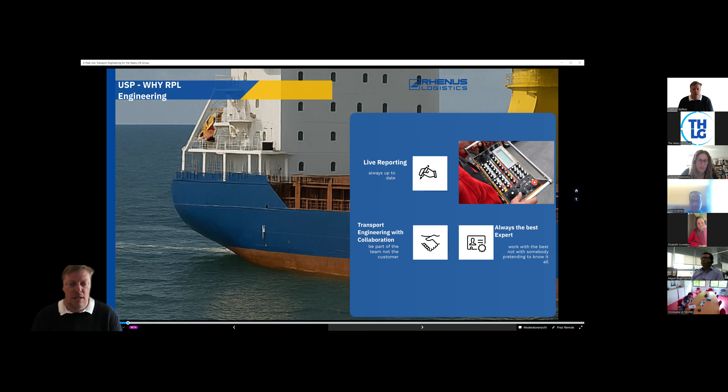So we try to find an expert who really knows the cargo or the ship type best, to have the best solution on the spot, because we don't want a surveyor who's just taking pictures, where in case of a claim he can say, okay, I saw it, I was there, here's the picture, here's the proof. No, we want somebody who can step in and say, stop, let's not do it like this - this is dangerous, this is not safe, but I have a solution, let's do it like this instead.

And this attitude you can only get from expert personnel. So sometimes it's much better, even if you lose some money, by sending a freelancer instead of sending your own staff - then you are free of your headaches and you get the best experience. And all of a sudden, like you might have felt, we're also doing workshops and trainings.

So just quickly a little bit about me. I started about 20 years ago after my time in the Navy, in 2001, with a German carrier called Cargo-Levant as a shipping apprentice - quite a normal way in Germany to start in shipping. And after all the commercial, water clerk, operation, chartering, I went to university and studied shipping and logistics.

And during university time, I figured it was good to work a little bit, and I went to Harren & Partner, which was back in the days with the carrier J. Poulsen and Combi Lift, when Combi Lift was not a forwarder but a carrier with its own ships. I started there in the engineering team and also on the small project freight forwarder they had in-house, where we did engines to Mombasa.

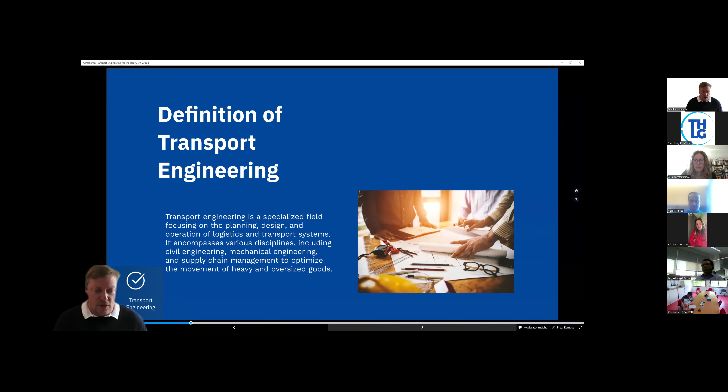So I just laid down a couple of bullet points. Sometimes we are professional overthinkers, Colin can tell you, and also many of you might know sometimes the transport engineer or the surveyor steps in and asks questions nobody has thought about, which can be the pain in the behind, but mostly it's because of a reason, because they have seen things go wrong or experienced that this is not really safe. So sometimes it makes sense to listen to them.

Stowage planning is one part. We have to look into the drawings and also sometimes tell the shippers how to make the drawings. Because the guys from construction are also now working with more and more 3D models, which they don't want to share because obviously they don't want any company to copy their products. So sometimes we have to tell them, okay, for transportation we need a side view, a front view, a top view, we need the COG, we need the capacity of your lifting eyes, and things like that, which the manufacturer normally doesn't think about.

So we have to not only read the drawing, but sometimes also consult what the carrier, the stevedore, the crane operator need to see in the drawing to be able to handle that cargo safely.

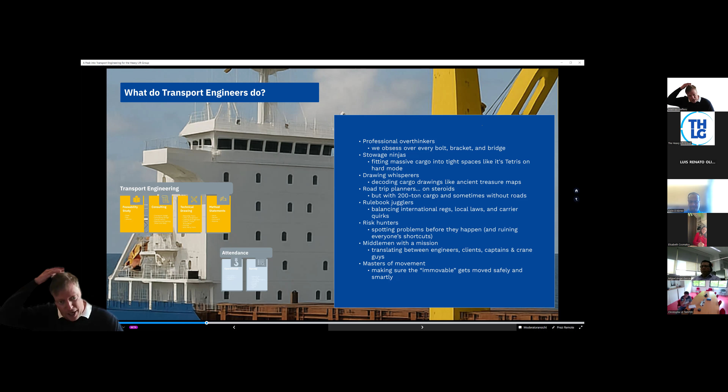And luckily I also have a commercial background. So some of the ideas I hear or have in my head, I have to filter out even before going back to the commercial part of our customers. Otherwise, they would laugh at me or kill me directly.

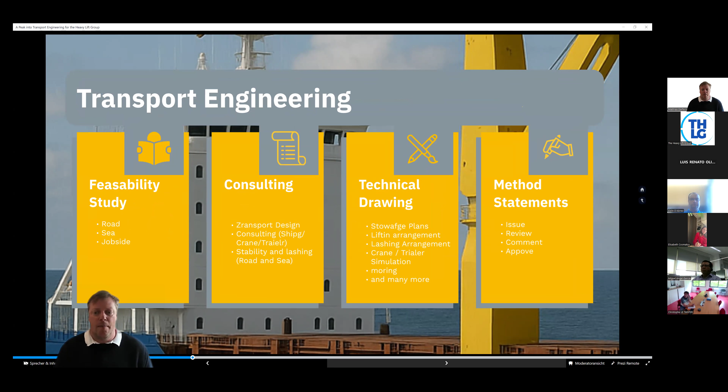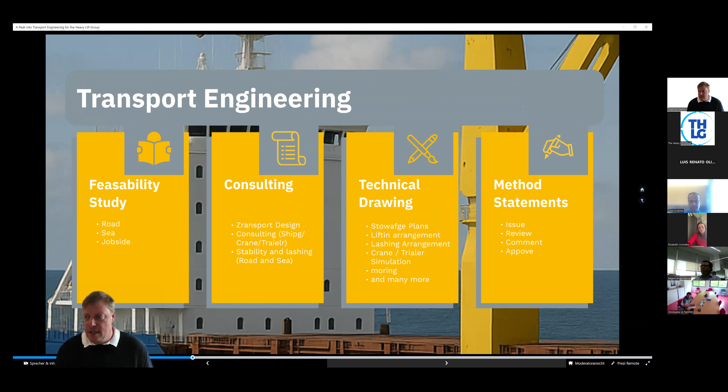So just a summary of a few things. Our main in-house work is feasibility studies and consulting. As I just said, we prepare technical drawings of stowage plans, lifting arrangements, lashing arrangements, crane drawings, and we issue and review method statements.

The second part, as I mentioned, is attendance. This can either be as a port captain, who is the link between the stevedore and the master and helps to load the ship at best, or on the other side, as a surveyor, looking at it from another perspective, giving hints, saying stop.

We make survey reports for the insurance companies, for the carriers, for the heavy hauliers, and for the forwarders. So the importance of heavy lift and out-of-gauge cargo comes more and more into play as insurance companies got more and more conservative. We regularly hear that insurance companies now change their policy a little bit, where they say, okay, we reduce your premium, but therefore you have to find and pay your own surveyor, and we have to approve him if we like him, if he's okay with the experience, and send him out.

Because cargo values are getting higher, and on the other hand, the cargos are getting more and more complex. One big topic, of course, is modularization. We hear it from ThyssenKrupp, we hear it from many other companies, trying to produce as much as possible on the yard in modules, and then later on at the final destination, just collect the modules, put them on each other, and then you're ready to go.

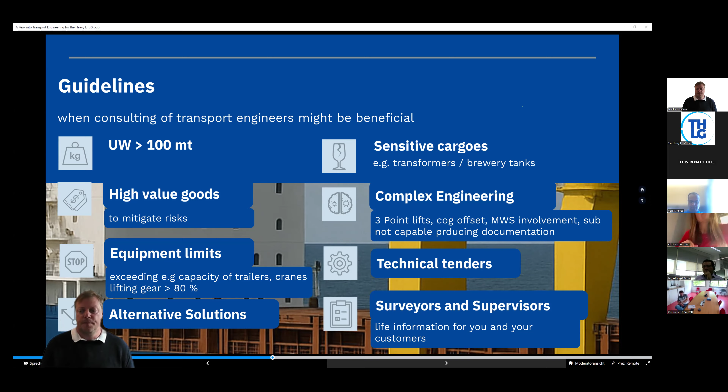So as I just said, transport engineers get more and more important, but on the other hand - only talking for Europe for the moment, I know in the US the problem is equal I think, but I can't speak for Asia and South America - we have less and less qualified transport engineers at the moment.

Just for example, for the Port of Hamburg, at the beginning of the year I had 3 freelancers I was working with regularly. All shut down their offices now. And this is not because they weren't working enough or there wasn't enough work - this is the opposite. Either an insurance company came to them and said, okay we want to hire you, here's your fixed salary and you don't have to hustle from job to job, or their biggest customer took them directly over.

Or they really went out of business due to the complex work atmosphere - not because they didn't like the job, but some of the freelancers being 30 days a month on the road without seeing the family, and being at risk of getting claimed, were just not taking it anymore and didn't want to hustle with that anymore.

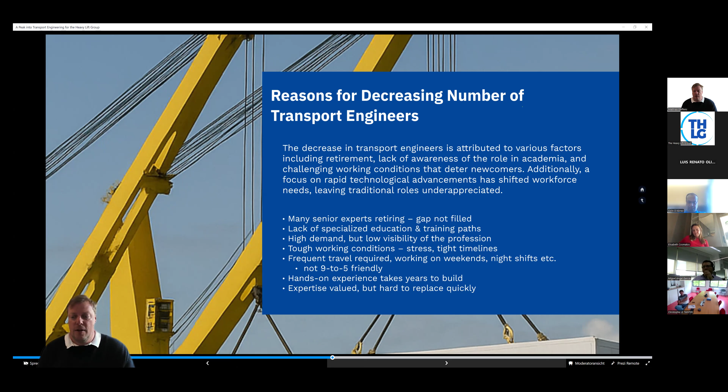We are lucky to have some, but this will not be getting better in the near future, I would say. So for the market outlook, I already said in the transport engineering field, I see the demand is growing.

The demand is growing in line with the ISO standards and the HSE standards. Because the higher the HSE standards or demands from your customer get, they want to make sure the HSE standards will be followed. They ask for a method statement, a risk assessment. This has to be written, prepared, reviewed, and also supervised in the port with a surveyor or even an HSE surveyor.

That means the staff you need for complex projects, for EPC, has increased dramatically in the last years. I was talking last year to a guy from Ørsted, the wind manufacturer, on a job site, and he told me when he started at Ørsted, they were a project team of 6 guys and built a wind park.

This was the good old times for him. Now it doesn't matter if the nacelle gets bigger or if there are more modules in the wind park, because that just makes the time longer. He said nowadays they have 60 people in the project team, more or less 54 people pushing paper and inventing documents the others have to fill out, and the 6 people from the past are building the wind park. So you have to consider all this.

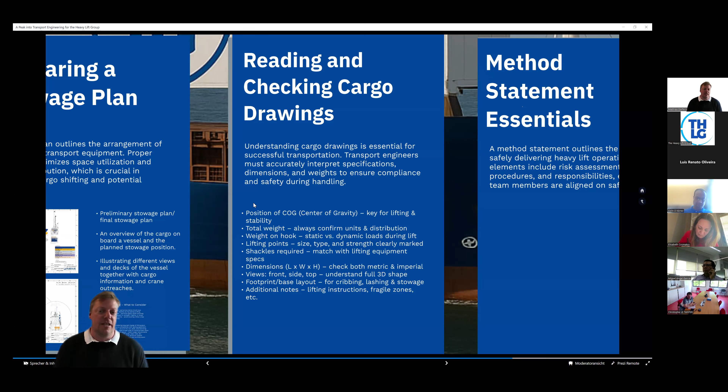I really love it when shippers come to me and say, okay, we want a full method statement, but you don't get any cargo drawings because we're afraid of copycats. This is very interesting. Or they send you a cargo drawing in really bad PDF quality - really bad quality - and you should make the most of it, which is very difficult. Then we end up making a kind of cargo drawing ourselves, which is no problem for us, but for the customer it is, because they pay us by the hour.

So, is that why you come and see us after? Sorry, say again? That's why you come and see us after.

What we need inside a cargo drawing is mainly always the same. It depends a little on your cargo, especially on the footprint size matter, but we'll have a quick look at an AutoCAD drawing in a few minutes.

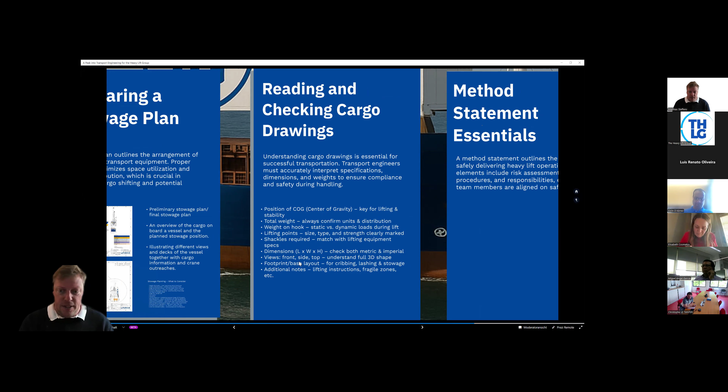Of course, we need the total dimensions: length, width, height. We need the position of the center of gravity in the front view, side view, and top view, because this is what we always need for lifting. It doesn't matter how we lift, the center of gravity of the cargo will always move underneath our hook. In a worst case scenario, this can lead to the cargo moving, and if someone is standing there, then we don't just have cargo damage, we have a totally different issue. Luckily, I've never had an incident with blood on the cargo, and I want to keep it that way.

The number one rule, especially for cargo drawings, is bullshit in is bullshit out. So the cargo drawings need to be accurate and reflect the cargo, especially when you have packed cargoes. It doesn't make sense to send a cargo drawing like 'this is how the cargo looked 10 years ago,' but we don't have a new drawing, and then you have the case fully packed and you don't see the center of gravity, you don't see the lifting points - you see nothing.

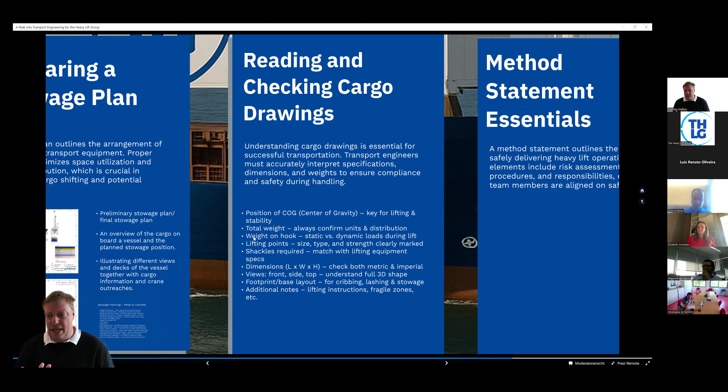That doesn't help. So you need the information of the total unit weight, including packing and everything. Then sometimes you have the weight on the hook with a static and dynamic load. This goes too deep now - I'll leave that out for a moment.

The lifting points - do we have trunnions? Do we have pad eyes? Can we sling around the cargo? Where are the strong points to lift? What's the size of the trunnions? If my trunnion is only 100 millimeters wide and I have a 150 millimeter lifting sling, then I can't squeeze it in. If the pad eye is too small for a 50-ton shackle and I can't get it in, I must use a smaller shackle. But if the cargo is too heavy for that, then it doesn't work and it's not safe. This is something we can identify at a very early point.

Inside these cargo drawings: are shackles required? Which shackles are required, as I just said. So dimensions we already had, and the views: front, side, top view. Many people now send this 3D image, the so-called ISO view, which is nice to look at the cargo and see a bit more detail, but it actually doesn't help us a lot. The front view, side view, and top view - that's what we need.

If you have cargo standing on special plates, on feet, or on legs, and has a decent weight, you might also consider the footprint, which is a bottom view. That means you have a footprint drawing - it's like the cargo flipped upside down, and you see the areas where the cargo is touching the ground. From that, you can calculate your ground-bearing pressures. Additional notes, like lifting instructions - please only use soft slings, for example, or don't touch here - things like that, which are really important.

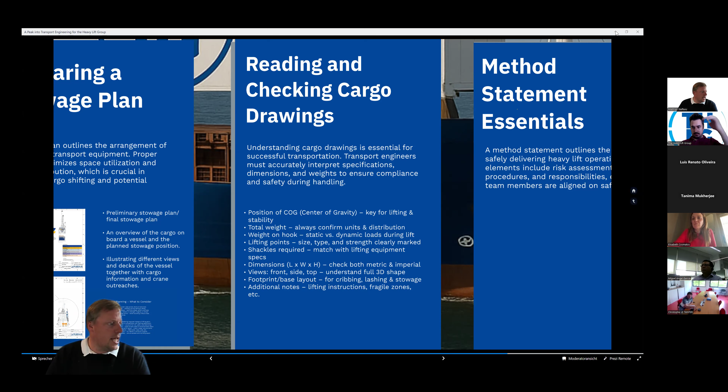Now you should see my AutoCAD, right? Nothing changed. Not yet, okay, I have to click a button first. Better? Better, okay.

In this case, we have an unnamed generator, for example, which is quite a good example for cargo drawings. In this cargo drawing, you even have a lifting scheme - that means they tell you please lift with a traverse, which means a lifting beam. This is the front view. We can do it a little differently.

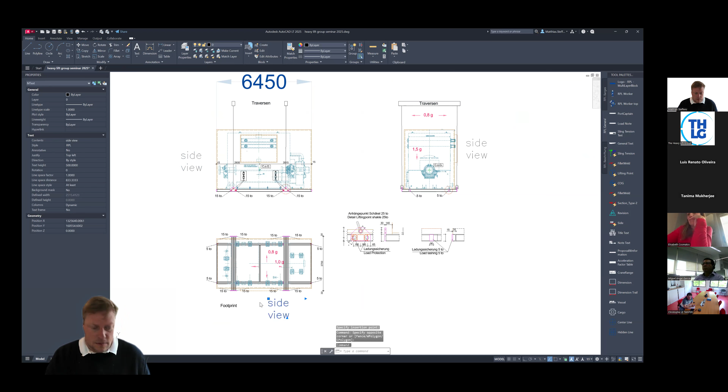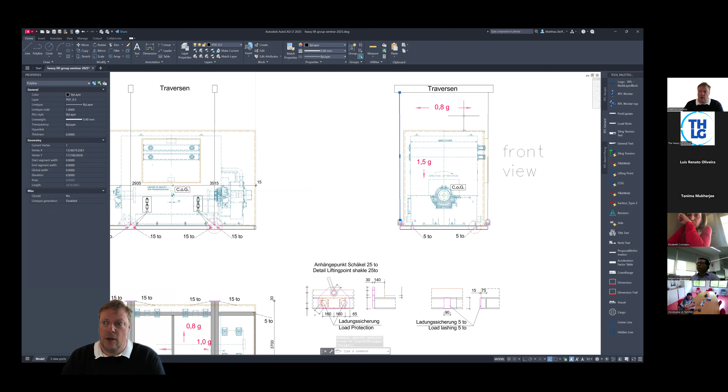Okay, on the front view, you already see it is compulsory to use a lifting beam because these lifting slings have to go vertical. They're not allowed to touch the cargo. You see the forces which are allowed in each direction to handle the cargo.

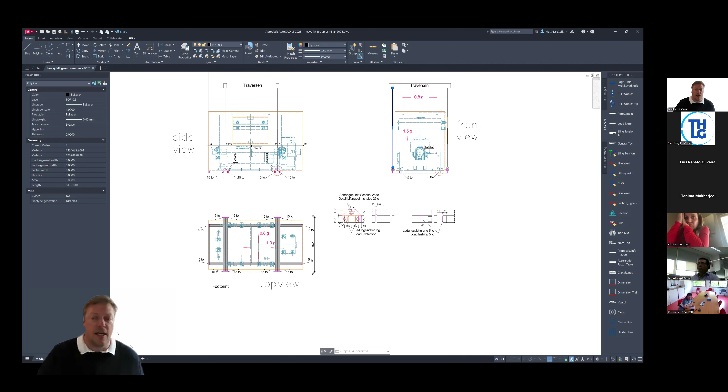Okay, here the forces: forward and aft 1G, transversal 0.8. This gives you already an indication. Sometimes if they are lower, this can also involve the position on an ocean vessel. The further you are forward on the vessel, the higher are the accelerations, or if you're on deck, they are higher. So this is something we can learn from that.

But let's start from the side. So this is our side view. We see there's a case around it, what type of case whatsoever. We have 3 pad eyes here. One is obviously for lifting, and these 2 are for lashing. We can apply 15 tons.

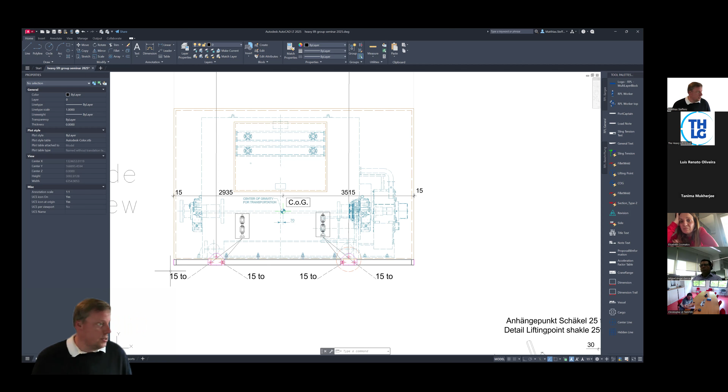What does that mean? And in this case, that's a really good question because we don't know that. Is it 15 tons breaking load? That means you can pull with 15 tons and the plate breaks. Or is it 15 tons securing capacity? So this would be the first question then to the shipper: what 15 tons? Because are there safety factors inside or not?

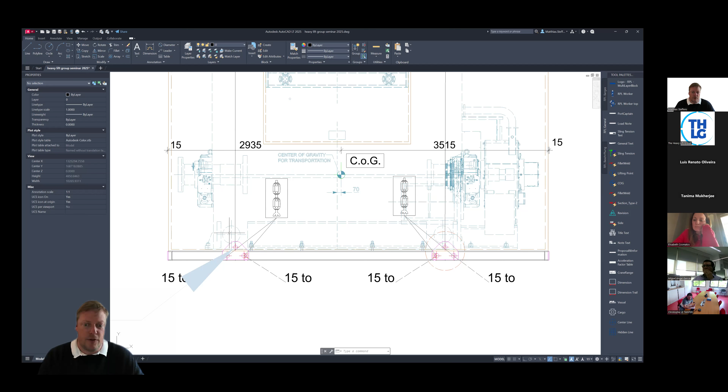What we don't have is the diameter of the lifting eye here, which is now 70 millimeter. And if I have the cargo weight, just to make it easy, we now say it's 100 tons. We have a straight lift. That means we have 25 tons on each lifting point. Now I would need to check if a minimum 25 ton shackle works, because if the cargo is tilting, it would exceed. So the next shackle would be a 35 tons then.

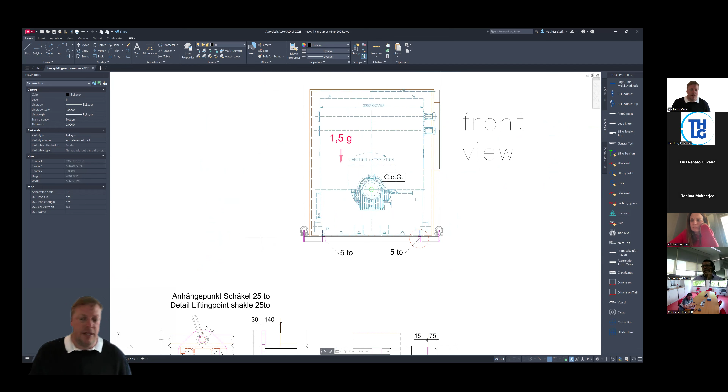If a 35 ton shackle will fit in that hole, so that it looks like here. Sometimes you also find information like, please use this shackle. In this case, that means lifting shackle 25 tons. So here we have the information already.

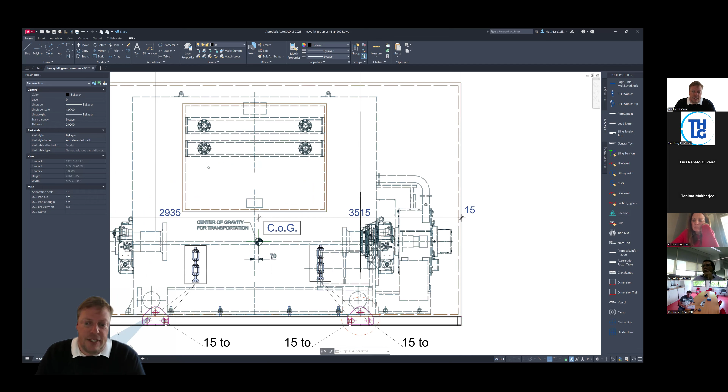What we don't have is the information where is the center of gravity. Here it says it's 70 millimeter off. Is it 70 millimeter off from the front to the aft and from there to there? Which is for us not really important. For us, the distance of the COG is always important towards the lifting point.

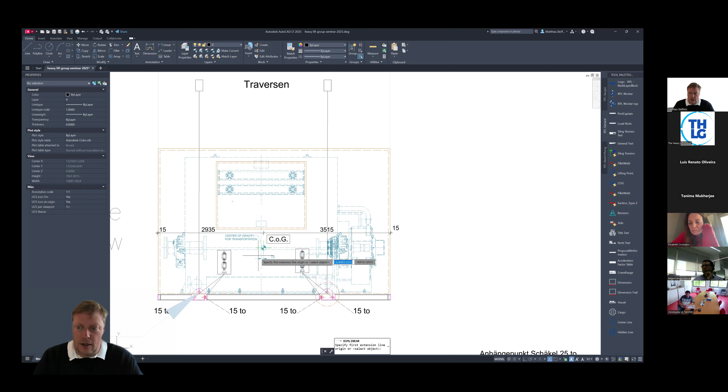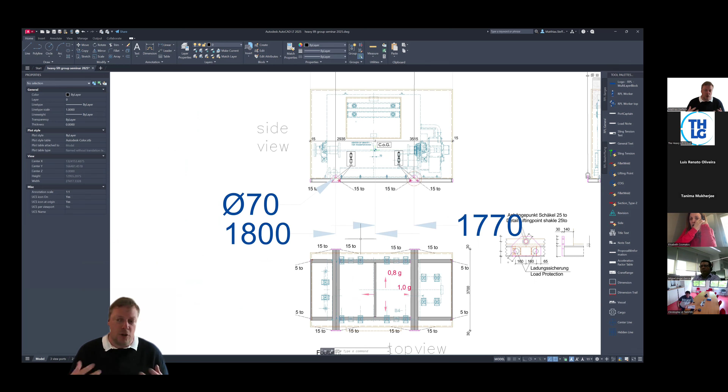Okay, this is now a 30 millimeter difference, which is more or less nothing, which we would ignore. But sometimes you have a difference in there. In a tandem hook configuration, this means one crane is carrying more weight than the other. In a single lift configuration, this would mean your cargo tilts. Actually, it would mean you have to change the rigging so that your cargo doesn't tilt. But this is something you have to plan ahead then.

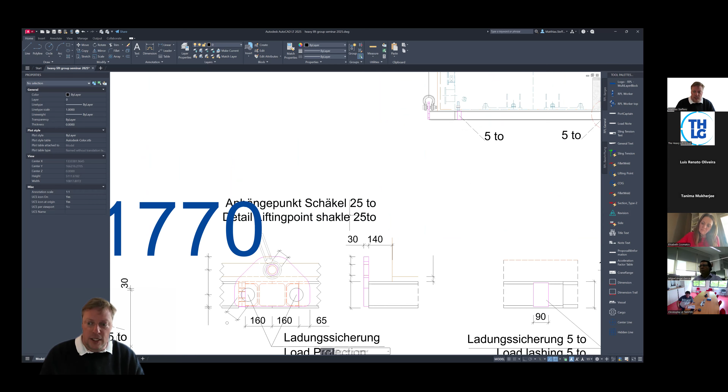So, but what I just said, what information we need - that's additional information. How can we sling it? We have the traverse, what's the detail on the lifting points? The lifting points require 25 ton shackles. So we have the cargo securing points, here 5 tons, here 15 tons. Whatever these tons and definitions are, maybe that's in the documentation coming with the drawing. We don't know so far.

We even have a small lashing sheet. So now we can make our lashing calculation and our lifting range, and based on that see if it works, if we can fit it to that.

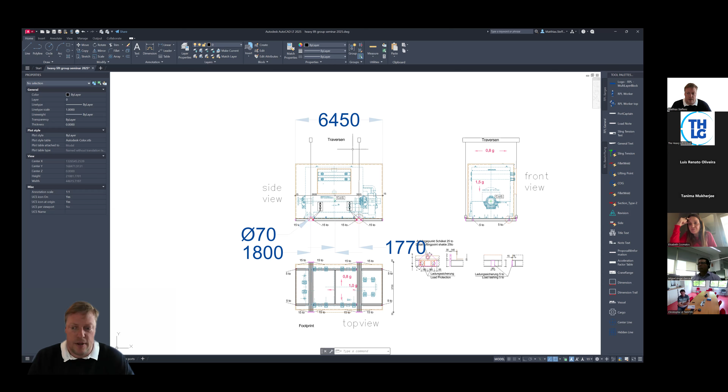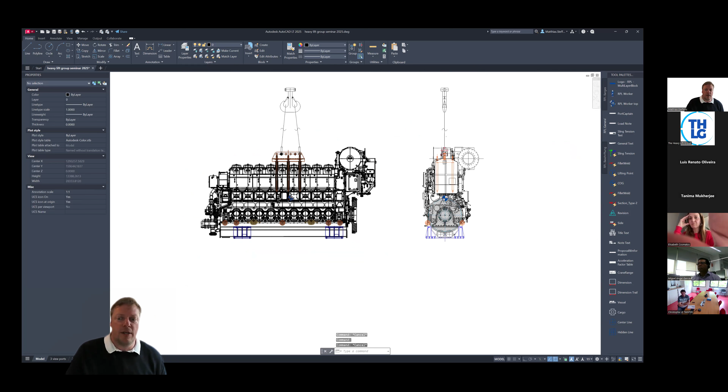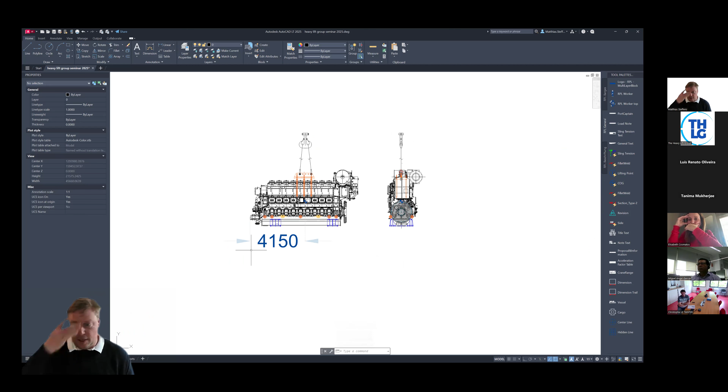On the other hand, there was a logo on it. On the other hand, you see cargo drawings like this. The COG here comes from me, because with this cargo drawing, I received the COG in dimensions. Meaning, by the way, the drawing is just an old design, but the COG is now 4,150 from the one end of the engine, for example.

So, and then you have to hand it in to position your crane hook and things like that. We have also here the positions on the lifting points, but in this case, I deleted all information, which means now we have to go back.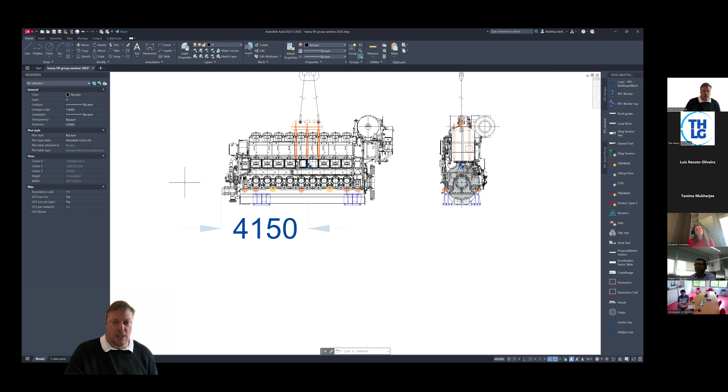Especially on the engines, there are some funny manufacturers who install on the engine 5-ton lashing rings, which is really nice for us transport engineers because a standard lashing chain on board a ship has 10 tons capacity. And you can't use half a chain, obviously. So that means you have to reduce the calculated strength of all your chains to 5 tons. But still, when the forces are exceeding due to bad weather or whatsoever, your chain will not break - your lashing point from the cargo will be torn or breaking.

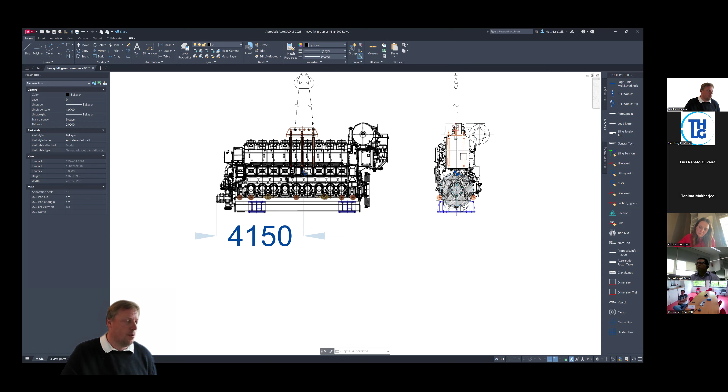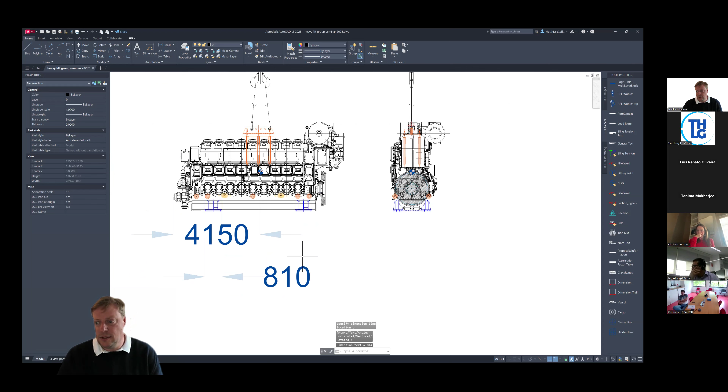So also here, we have no footprint. We see the cargo is touching only here and there. Now we would measure our touching phase, 810 by 1,780. And then we take it times 2, and we have the square meters where the cargo touches the ground.

So with the weight of the cargo, we have 1.78 times 0.81. That's a square meter surface of one of these consoles. So we need to take it times 2.

So 2.88 square meters is the area where the engine touches the ground. And if we round it a bit: 250 tons engine divided by 2.88. That means you have a ground bearing pressure underneath that area of 86 tons.

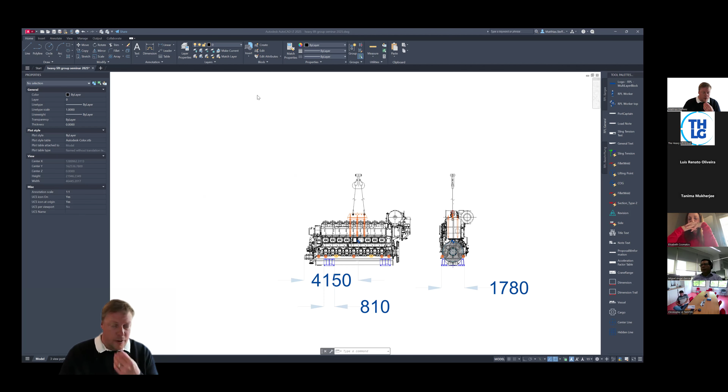Which is quite something. That means maybe on the ship you need to talk about load spreading, or on the cargo. On the premises, you need to make sure how you place it, load spread, what's your ground bearing capacity on the premises where you want to lift it, where you want to place it.

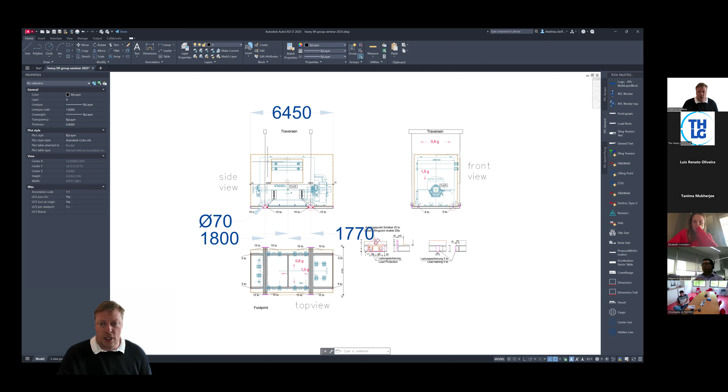Sorry, getting confused here. But this is actually all the trick when it comes to cargo drawings. When you have the information - side view, front view, top view - you look: where's the COG? Is the COG inside? Do I have information on lifting and lashing points?

Back in the days when I started in shipping, in each and every inquiry we sent out from the carrier to the customer, it stated the cargo must have suitable lifting and lashing points. Otherwise, we leave the cargo behind and claim dead freight, because the cargo is not seaworthy for shipping.

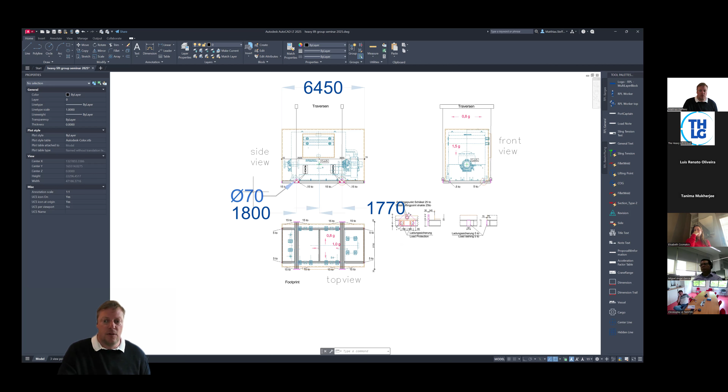I know times have changed a lot, and not too many carriers will leave cargo behind. But still, for the safety of the cargo, having the information about suitable lifting and lashing points at a very early stage relieves a lot of headaches, and is really beneficial for all your subcontractors, be it the stevedores, the crane operators, the heavy haulier, the carrier, whosoever is dealing with and handling your cargo.

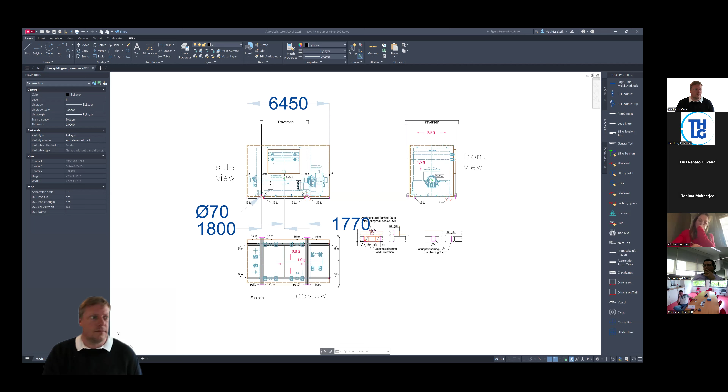Any more questions about cargo drawings? Because otherwise, I would close this topic.

Okay, what's the time? Do we have some more minutes? Or should we call it a day?

I think that unfortunately we don't have enough time to cover another section, although I would love to hear more about the method statement. I don't know if that's too big, is it?

I can just pinpoint or just throw the bullet points on the board. That should be a quick one, yeah. Thank you.

If I find my presentation, there we go. So the method statement. You see my screen again? Yes. Okay, the method statement.

Basically, talking in football language, it is our playbook. The method statement should cover from A to B what we are planning on doing with the cargo. The method statement came into play 20 something years ago.

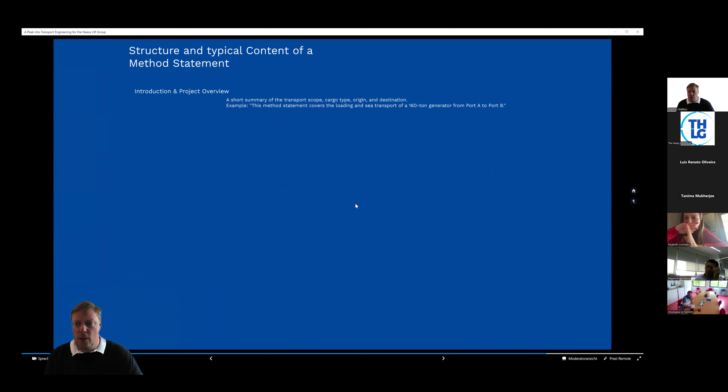Usually it is in a sequence where you can follow the transport in logical order. Sometimes it's a little different because things are alike, so not to duplicate them, but we prefer starting at point A with the introduction, and the project overview, so the reader sees what's actually the content of this document and the project, to get a full overview.

Then you start with the cargo description, packing list, cargo drawings, maybe some specifications, like pay attention this cargo is highly sensitive or whatsoever. The transport routes - I usually separate the method statement into chapters: pre-carriage, ocean transport, and on-carriage, with the different steps in between separated. That gives a full overview of what you're planning on doing.

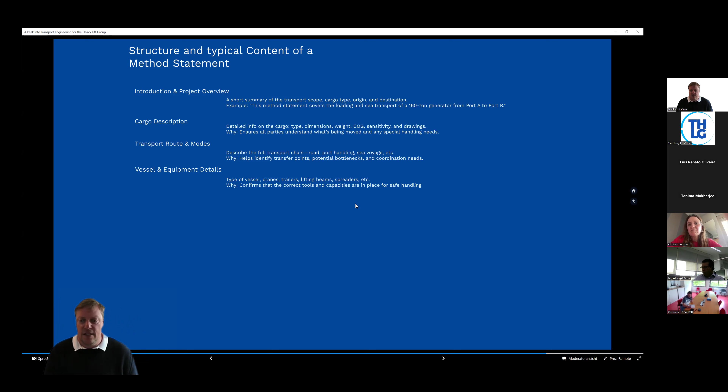You describe your vessel, so what type of vessel I'm using. The vessel data sheet, for example, is a good hint. You describe the crane's capacity if it's a geared vessel, the trailers you're using, the lifting beams, the spreaders.

All the equipment you describe in there is usually, by a marine warranty surveyor for example, or by an insurance company, later on commented with: do you have certificates for this? Do you have certificates for the crane? Are they valid? Do you have certificates for the lifting gear? Do you have certificates for this, for that?

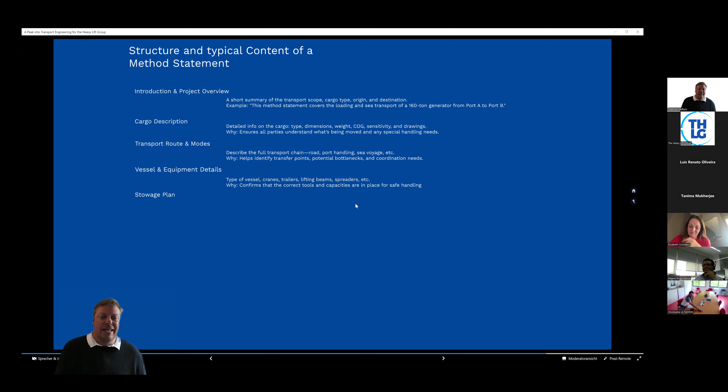So that means if you just write in 'we use some slings and a shackle', you can be sure somebody will ask questions because they don't find enough details to familiarize themselves with the project.

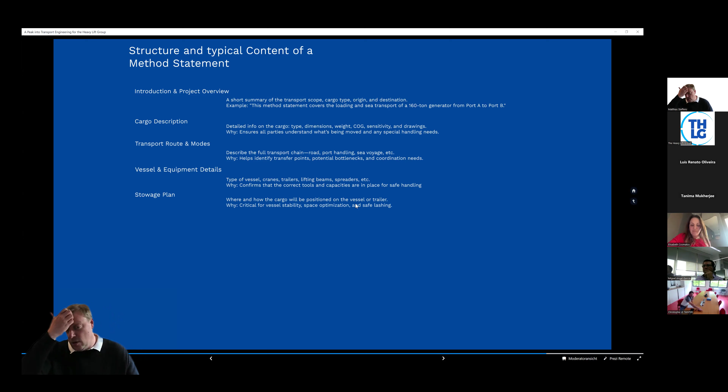Then, of course, with the vessel, you also have the stowage plan, or when it's on carriage, the trailer plan, with the trailer stability, or in this case, the vessel stability, where you say everything has been checked, cargo fits on board, it's all nice and smooth, and we can start the voyage.

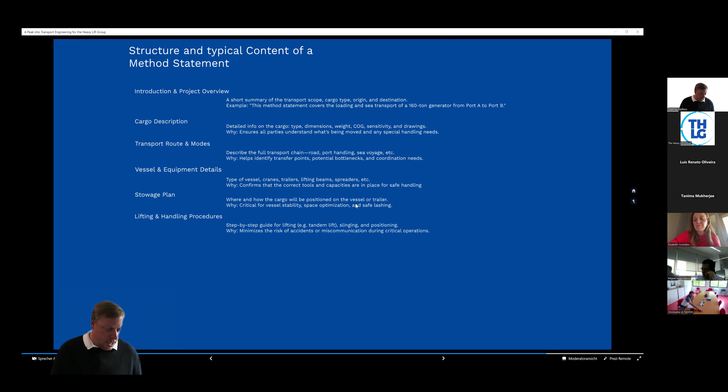To start the voyage, you describe your lifting and handling procedures. It can also be by placing cases and moving small stuff with a forklift, then making a tandem lift, hooking on the gear, using this and that equipment, inserting your lifting arrangement based on the very good cargo drawing you received from your customers, obviously.

Then you describe the lashing methods, the lashing gear used. You provide the calculations. For us, beside the lashing calculations, we always provide a lashing scheme or a lashing arrangement, because these Excel formulas and these lashing calculation plans are good for the engineers, good for the marine warranty surveyor, they understand it.

But who is actually executing the lashing? It's either the ship's crew, the trailer operator, or the stevedores. Nobody of them usually have read the method statement. Nobody will follow the calculation based on an Excel sheet from your lashing.

Give them a piece of paper showing the cargo drawing. Here's a chain, there's a chain, there's a chain, here's a stopper, and they can just do it by the picture. It's much safer. A picture says more than 1,000 words compared to having too much documentation and calculations. It must be safe, but for the actual handling, a picture and a drawing is much better than a text file or a calculation. So the risk assessment and mitigation becomes more and more important for the method statement.

In some companies, this is passed on to the HSE department and is a separate topic now. Some still have it in their method statement. Some customers requested to have it in the method statement. And that's the part which blows the method statement up a little bit.

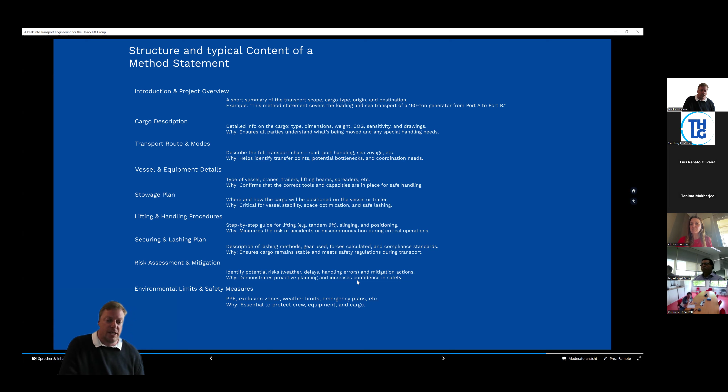So you describe the environmental limits. What do I mean with that? For example, if you have a crane operating, this crane has a manual where it says this crane is not allowed to operate in winds exceeding this and that wind speed. Also, other materials might not be used. For example, if you're in the north of Canada and you try to work in -20 degrees, then maybe it's not a good idea to use poly lashings, because they will break if they get wet, and things like that. So your environmental limits are also a part of the method statement.

Compliance and standards. Which rules have you been following? The CSS code for lashing. Are the SOLAS rules followed? Do you have an ISO standard? Are there specific port rules you follow?

And then you need a section: What is the revision number? What has changed for the next revision? What's the date of the release? And so on and so forth.

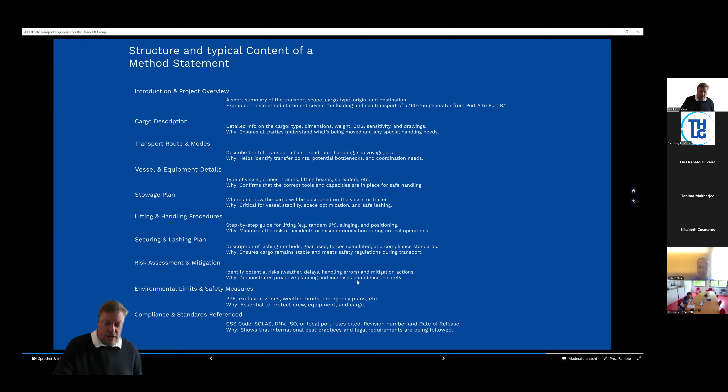This is all information which should be there, because I have so many situations where I run around in the port and having a method statement in revision 3 and the other party has revision 5 and the next party has revision 6. So always make sure you have the revision number and the revision release date on the document. But this also accounts for every lashing and lifting plan and every drawing.

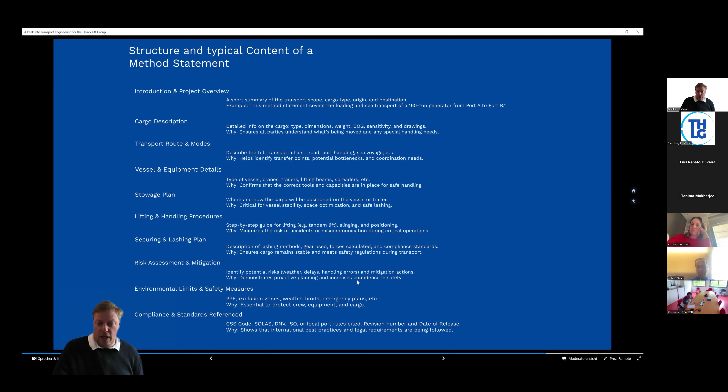Itself, so then usually we also have a disclaimer on it, but I think that's clear. That was just a quick one on the method statement. Sorry for taking more time, I thought maybe we can.

No, it's our pleasure. It was quite interesting to hear about the method statement because that's usually where the freight forwarders also come in, and that's how we base our transport solution. So I believe that it was interesting for everyone. I don't want to take more of your time, but I do have a question for you, and I don't know if anyone else has one. I don't know if you have another 5 minutes to spare for us.

Of course, great, of course. So my question would be, who bears the risk of what the engineers are suggesting? Like, for example, the Marine Surveyor, they are on a consultancy basis without really taking a risk about everything.

So, scenario A: you have an agent, a freight forwarder, and they try to bring in the best of the subcontractors to do the job, and then they follow the plan as the transport engineer instructed that this is the way you should do it, and something goes wrong.

What happens there? The transport engineer in most cases is always a consultant. The guys physically handling the cargo, the crane operator, the carrier, whatsoever, they can receive the plans and they can refuse it, obviously. But if they execute a plan, that means they should have looked at it and approved it.